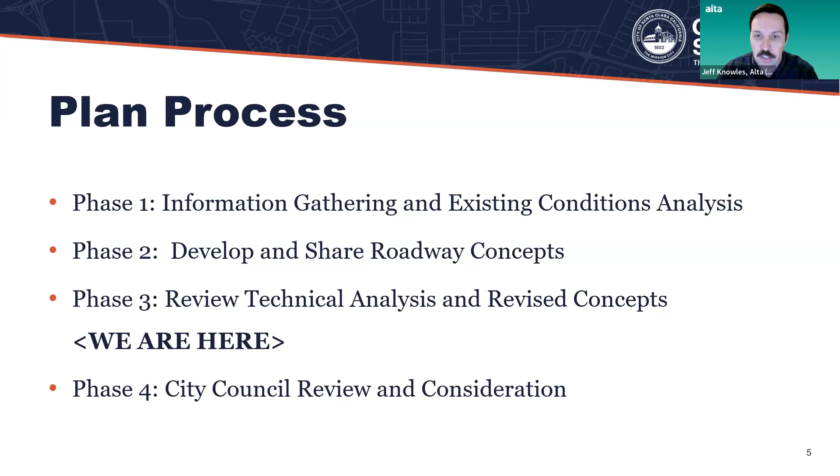In terms of the schedule, this is our third phase of community workshops. This will be the last time we have a dedicated community meeting for this, but we welcome you to come to future BPAC meetings — that's the city's Bicycle and Pedestrian Advisory Committee — and to the City Council adoption meeting.

Those will happen. There'll be a BPAC meeting later in the spring, and City Council consideration is anticipated for summer or maybe even early fall.

So a little bit about the project: the 2.6 mile Benton Street corridor is primarily fronted by residential land uses, but includes Santa Clara High School in the middle.

There are also many important community destinations along Benton Street or just off the corridor, including Carmichael Park, Central Park, Carly Park, and the San Tomas Aquino Creek Trail.

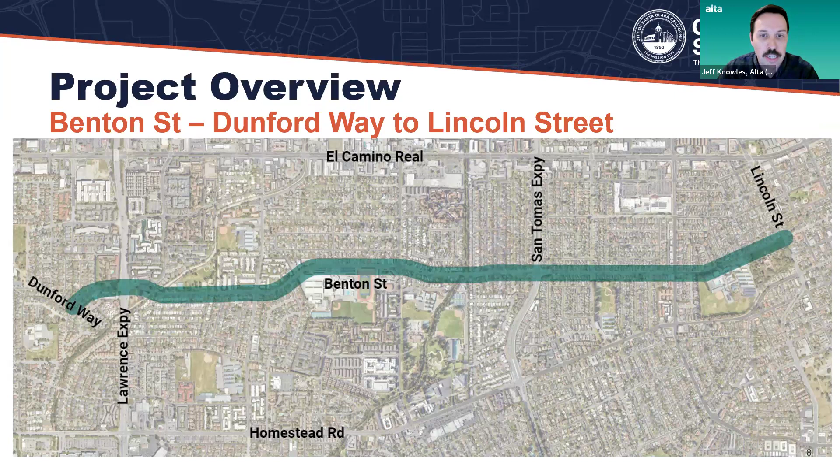I should mention real quick that this project is from Dunford Way to Lincoln Street, so that's the 2.6 mile corridor.

There are some different characteristics along Benton Street for this corridor, from Dunford Way to Lawrence Expressway. It's a very short segment of the study corridor, 0.1 miles, and it's 60 feet wide from curb to curb. It's a 2-lane roadway, and the posted speed limit is 25 to 30 miles per hour.

1.7 miles, the middle section from Lawrence Expressway to Maryann Drive is 64 feet wide, and it has 4 to 5 lanes. Posted speed is 25 to 30 miles per hour.

And then finally, from Maryann Drive to Lincoln Street, the roadway shrinks down to 38 feet wide. It's just shy of a mile, and it's a 2-lane roadway with a posted speed limit of 25 miles per hour.

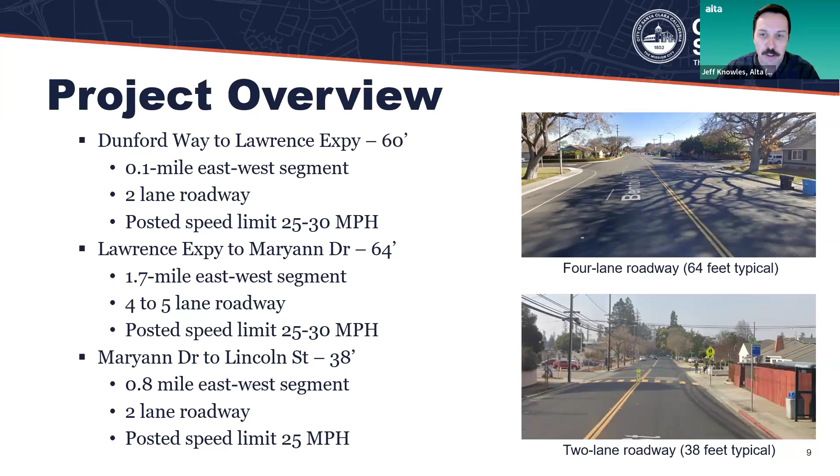We've been doing a lot of community engagement and outreach. In our first phase, we had 2 community workshops just like tonight. We had an online survey. We went out into the community and held 2 pop-up events, and we met with the city's Bicycle Pedestrian Advisory Committee. In phase 2, we had 2 additional workshops, another online survey, 2 pop-up events where we went to meet with different high school communities.

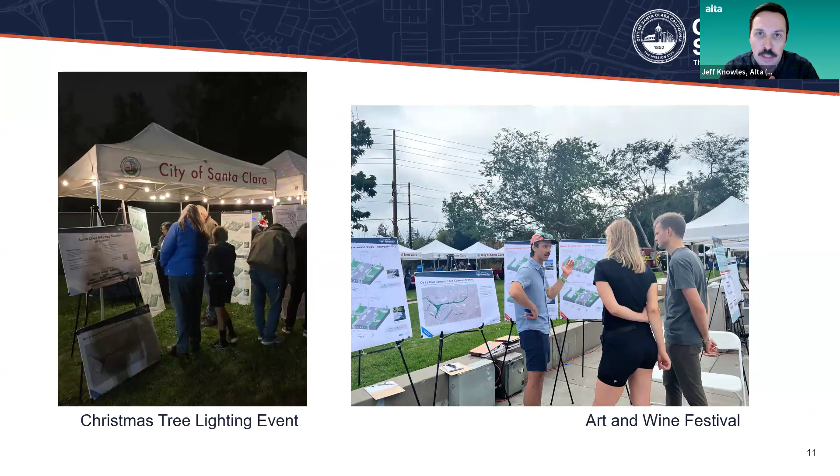Hopefully we saw some of you at the city's Christmas tree lighting event or at the Art and Wine Festival back in the fall and winter. This is where we had early draft concepts, and we were collecting feedback from the public about what these concepts could look like and the trade-offs.

We had a very well received online survey where we collected over 258 responses, and 10% of those were affiliated with Santa Clara High School. We asked about the level of support for different concepts and feedback on why people supported or didn't support some of these concepts that we'd come up with.

I want to report that respondents affiliated with Santa Clara High said having bike lanes will make it much easier to get to and from school and will provide overall improved road safety for all road users, and supported any bike lane installation.

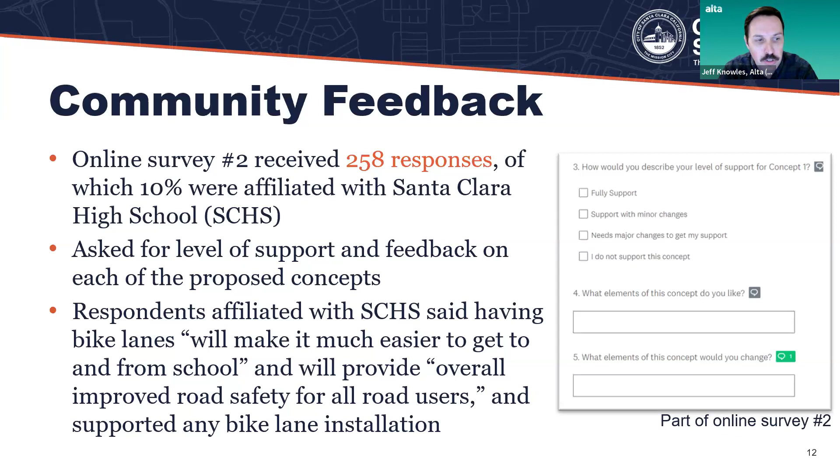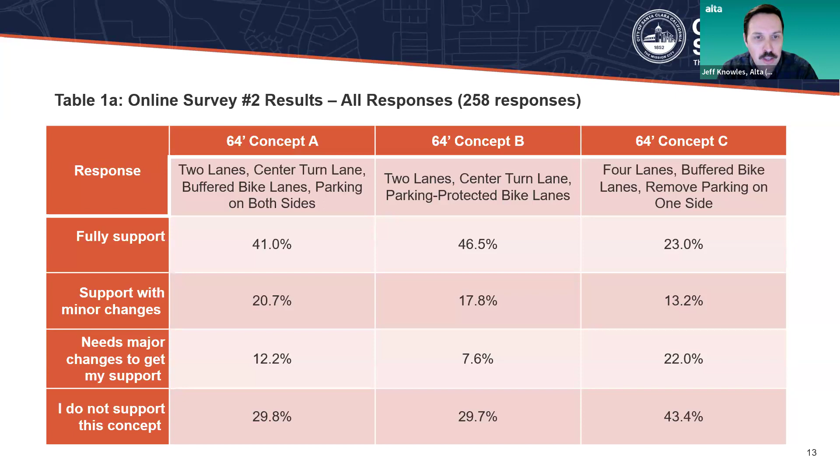The results from that second online survey that concluded earlier last year: 46.5% support concept B for the 64-foot section. This is 2 lanes of traffic, a center turn lane, and parking protected bike lanes. Coming in second place for fully support was concept A, which is 2 lanes, a center turn lane, and buffered bike lanes with parking on both sides of the street. Concept C for this segment came in at 23% of the support.

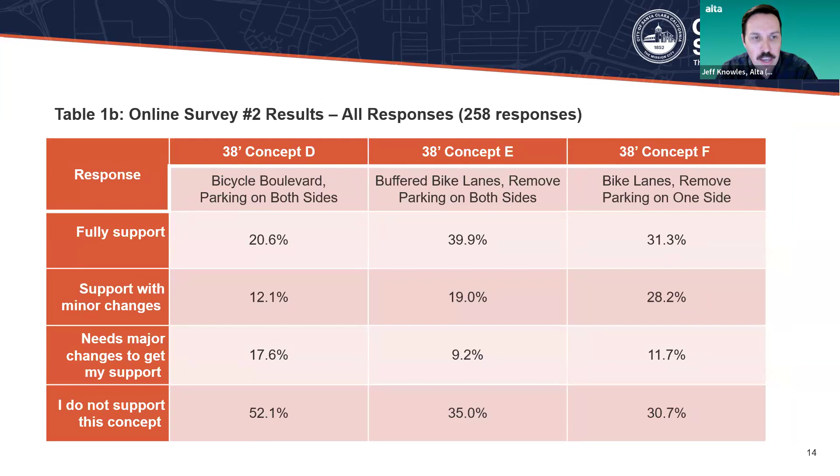There are also concepts for the 38-foot segment, and the highest support there you can see was concept E, which is to remove parking on both sides and install buffered bike lanes, at 39.9%.

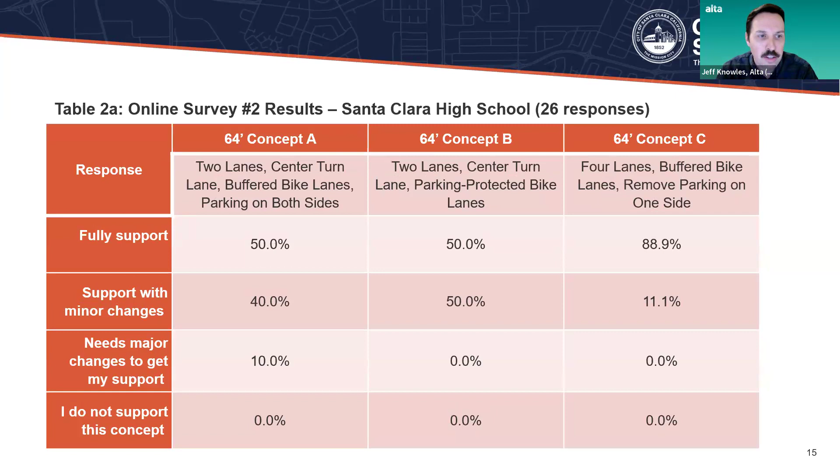And in the 38-foot section, split between E and F. E being removing parking on both sides to fit buffered bike lanes, and F removing parking on just one side and adding standard bike lanes. Those were the ones most supported by Santa Clara High School.

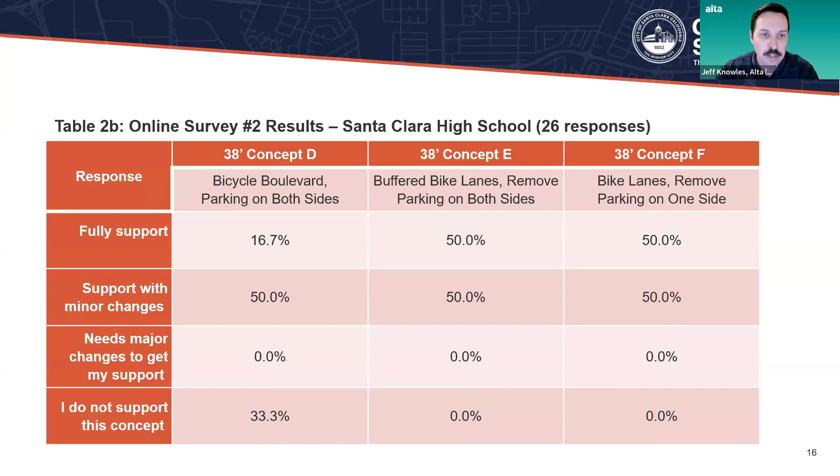So this survey is concluded and a new one is launched. We encourage you to go online after this meeting and enter your preferences so we can collect that for City Council for their review.

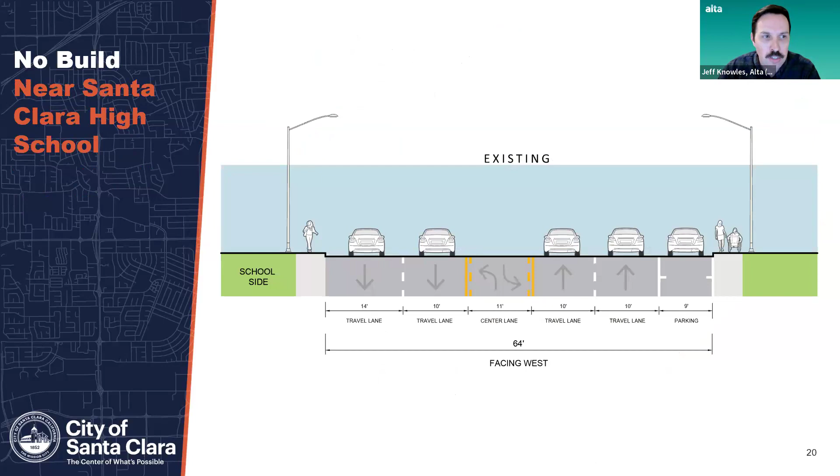The condition varies from Live Oak Drive to Sonoma Place near Santa Clara High School, where there is a 2-way left turn lane, parking only on the north side of the street, and parking restricted along the south side of the street. You can see that here in this cross section. So this is just this section near Santa Clara High School.

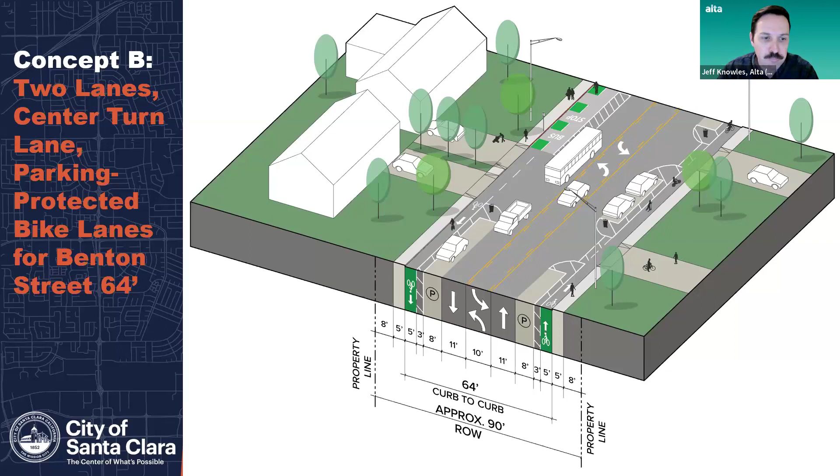Concept C maintains two travel lanes in each direction. Here we are removing parking on one side of the street in order to fit in buffered bicycle lanes. This study does not make a decision about which side of the street would lose parking under this concept. We've evaluated the impacts to parking on either side, and we'll be sharing that in just a minute. Travel lanes would also narrow to 10 to 11 feet, and you'd have a 7-foot wide buffered bike lane.

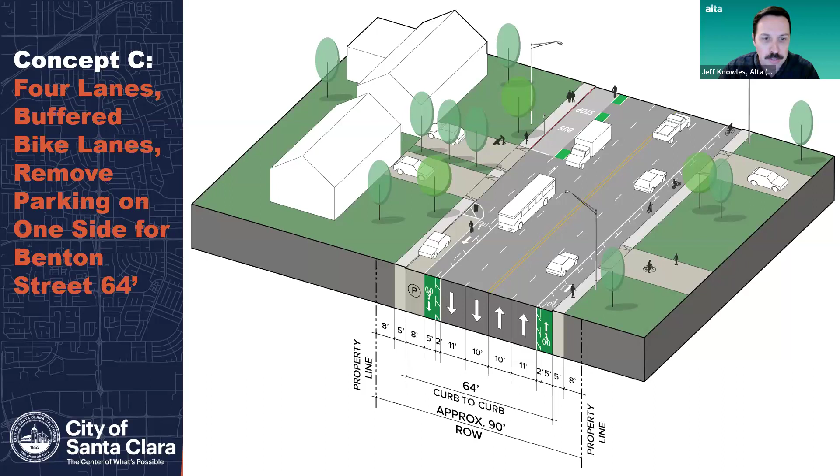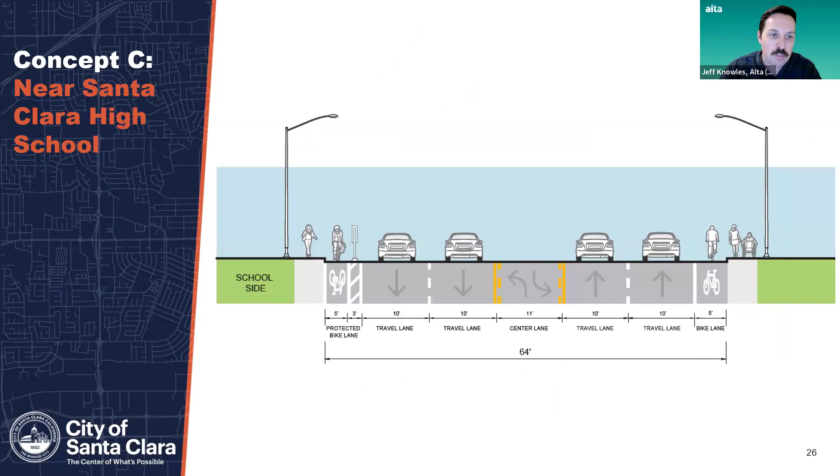Alongside Santa Clara High School, this concept keeps four travel lanes and a two-way left turn lane. On the north side of the street, parking is removed and a 5-foot wide bike lane is added—a very standard bicycle lane, with no room for a buffer in this scenario. An 8-foot wide parking protected bikeway is added to the south side of the street, with 5 feet for the bikeway and 3 feet for the buffer. Moving further east to the 38-foot typical section.

This is what is out there today. This represents your no-build scenario for this section of Benton Street, from Marianne to Lincoln Street. It's got 2 travel lanes, one in each direction, and parking right now on both sides of the street. The vehicle lanes are 11 feet wide, and your curb-to-curb width, including the gutter, is 38 feet wide.

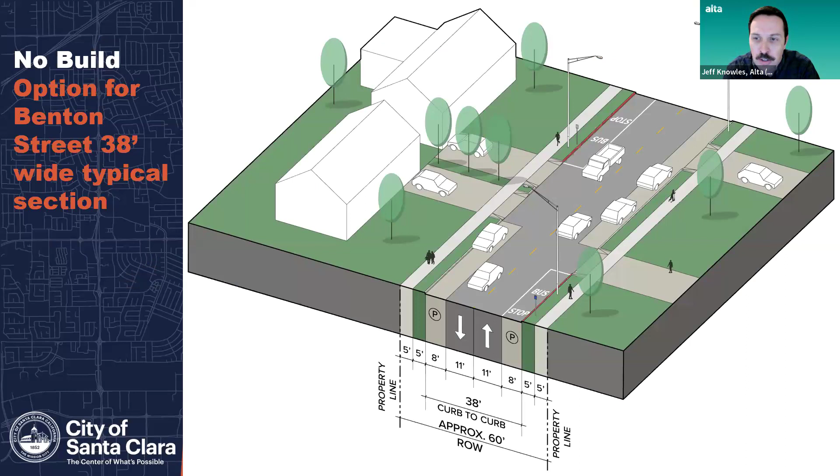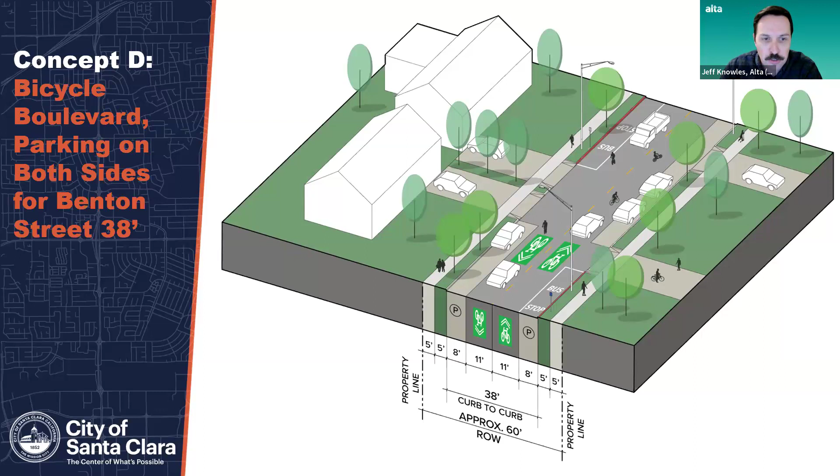Concept E has two travel lanes, one each direction. Parking is restricted on both sides of the street. An 8-foot wide buffered bike lane would be added to each side in replacement of that on-street parking, with a 5-foot bikeway and a 3-foot painted buffer. This is concept E for the 38-foot section.

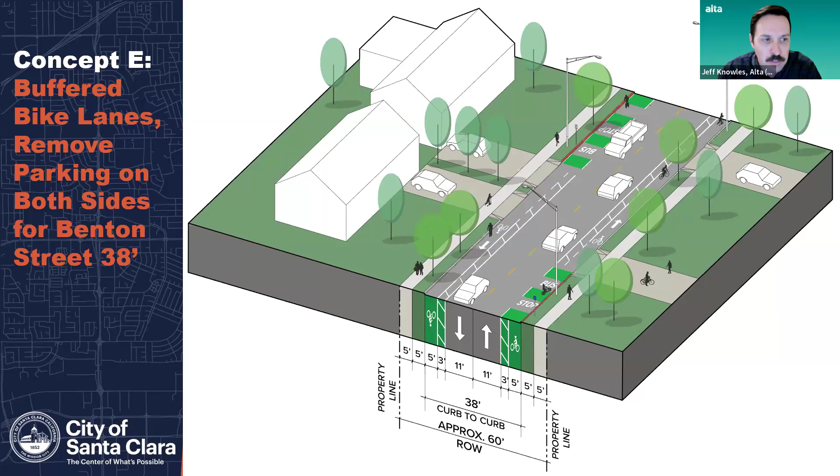Concept F has two travel lanes. Parking is maintained on one side of the street, and a minimum 5-foot wide bike lane is added to each side of the street. Vehicle travel lanes are also reduced to 10 feet wide. Just like in the 64-foot section, we're not determining which side of the street would remove parking, but in order to fit this one in for concept F, one side would need to remove parking.

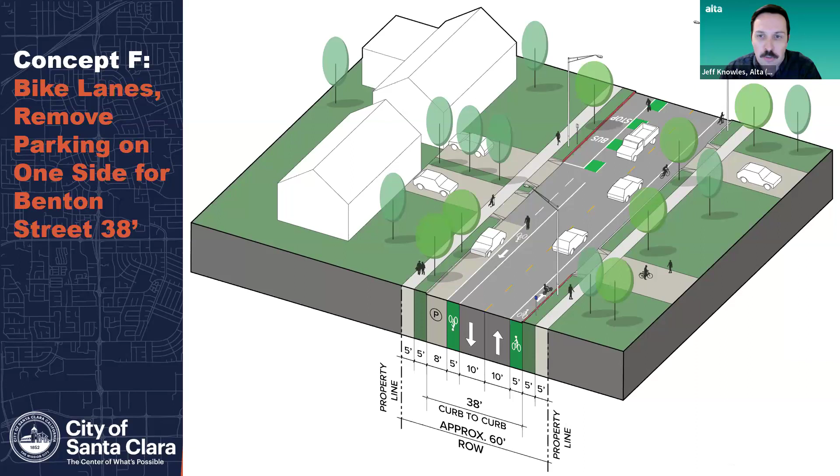And finally, the 60-foot section. This is from Dunford Way to Lawrence Expressway. The existing condition is shown on the top of this cross section. It's got vehicle travel lanes that are 20 feet wide and also parking lanes that are 10 feet wide. It's 60 feet wide from curb to curb, including the gutter.

What we've proposed, concept G, is shown at the bottom here: keeping the number of travel lanes the same and just reducing them down to 12-foot travel lanes. That would free up room for an 8-foot wide buffered bicycle lane in this scenario. So this is concept G. For City Council's consideration and for the public, we're asking you to select either keep it as it is or shrink down the lanes to accommodate this buffered bike lane for concept G.

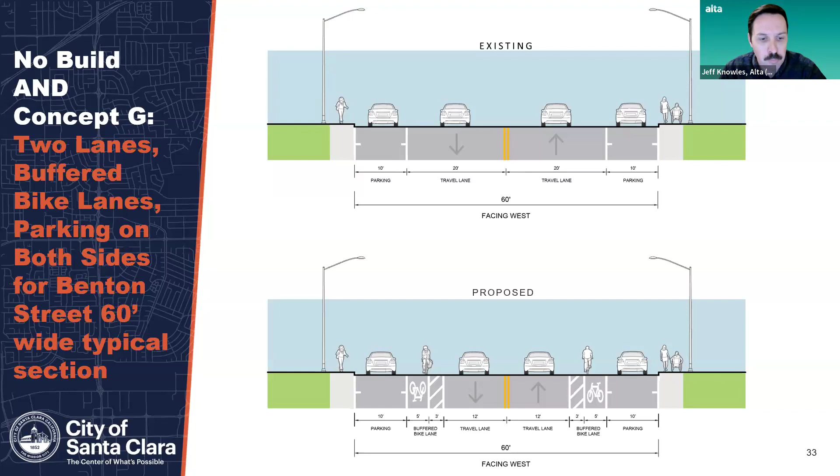So those are the concepts, and we'd be happy to, when we get to the Q&A section, answer any further clarifications you have about how these would operate or any of the benefits. But now I want to talk about some of the trade-offs and impacts that each of these concepts would have for safety, measured by the number of collisions taking place on the corridor, traffic in terms of congestion and traffic flow, and then parking, what each of these concepts would mean for available on-street parking.

So let's talk about collisions first. From 2017 to 2022, which is the last 5 years that we had available data, there were 122 vehicle-to-vehicle collisions and 16 collisions involving a bicycle on this stretch of Benton Street. These numbers serve as a baseline for the no-build or existing conditions concept.

The analysis estimates how many collisions would have been avoided during the same time period if each of these concepts was built. In concept A, which is your 2-lane, buffered bike lane concept with parking on both sides, it's anticipated that there would have been 39 fewer vehicle collisions and 2 fewer bicycle collisions. Most of that comes from the fact that when you take a travel lane down to one in each direction, it makes it easier and safer for people making turns at intersections and getting in and out of their driveways using that 2-way center turn lane, and also slows travel speeds down.

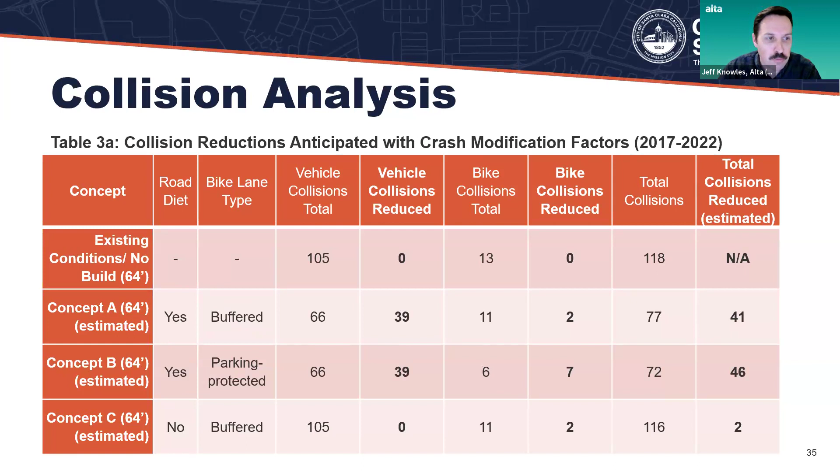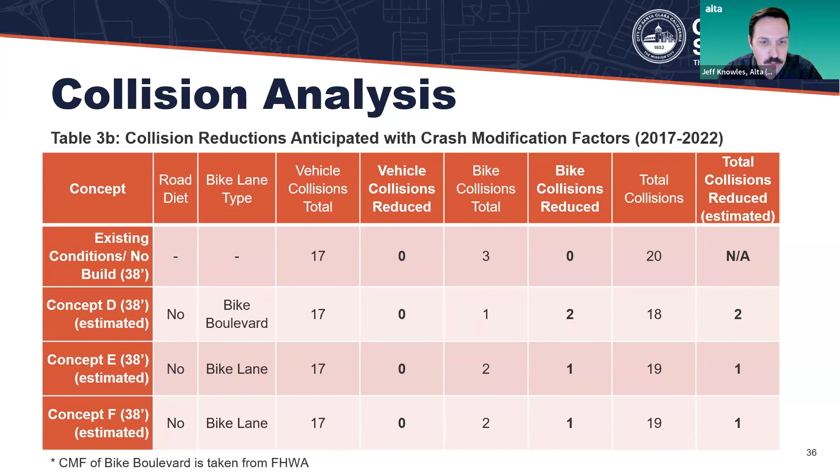Again, for the 64-foot section, the greatest impact would be concept B, with slightly fewer collisions reduced under concept A, no impact to collisions under no-build, and concept C would have 2. Under the 38-foot section, concept D would have 2, and E and F just 1. These, again, are collisions reduced, not total collisions that we anticipate during that time period.

For traffic analysis, the city evaluated the time it would take to currently travel the entire length of the study corridor in a car at multiple periods. We looked at weekday morning between 7 and 9 a.m., that's your AM peak period. We looked at midday between 1:30 and 3:30 p.m., which corresponds with the release period for schools in the area.

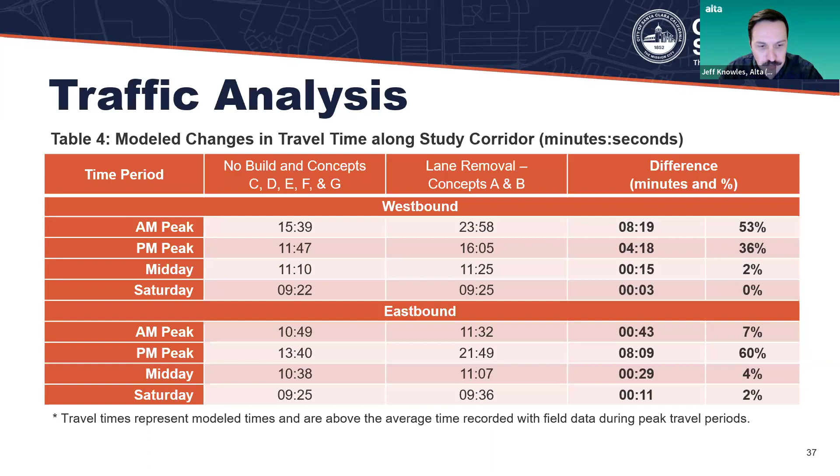We also evaluated the level of service at intersections along the corridor. We modeled this at 36 intersections, both along Benton Street, but also on surrounding streets to demonstrate any of the impact for any spillover effects that would have in the surrounding streets. Based on the level of delay, each intersection gets a letter grade, which is A through F, based off of modeling traffic speeds, volumes, and the density of traffic.

Intersections with LOS A through D currently meet the city's standards. Intersections with LOS E meet the city standards for El Camino Real, which is a state highway, and any of the county expressways. Otherwise, LOS E and F are considered substandard.

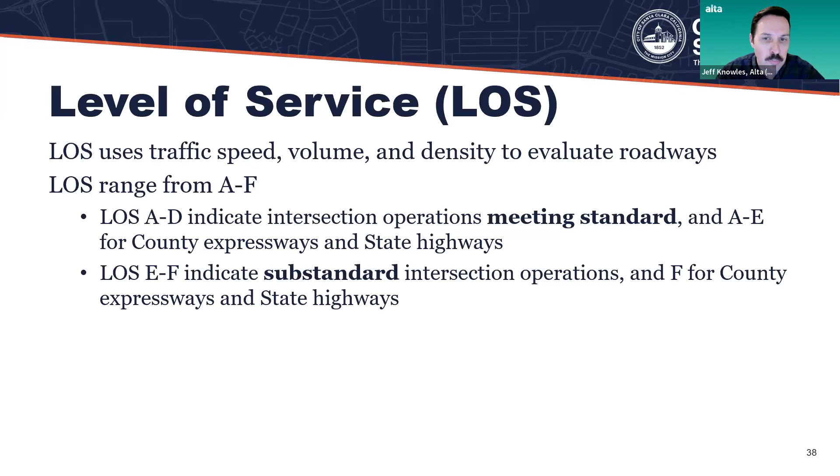So of the 36 intersections that we studied, 3 are currently substandard in the AM peak period, and 3 are substandard in the PM peak period on weekdays. Under concepts A and B that involve the reduction of 1 travel lane, the number of substandard intersections does not change. There still would be impacts at these, but they're minor and they don't change the scoring of those letters.

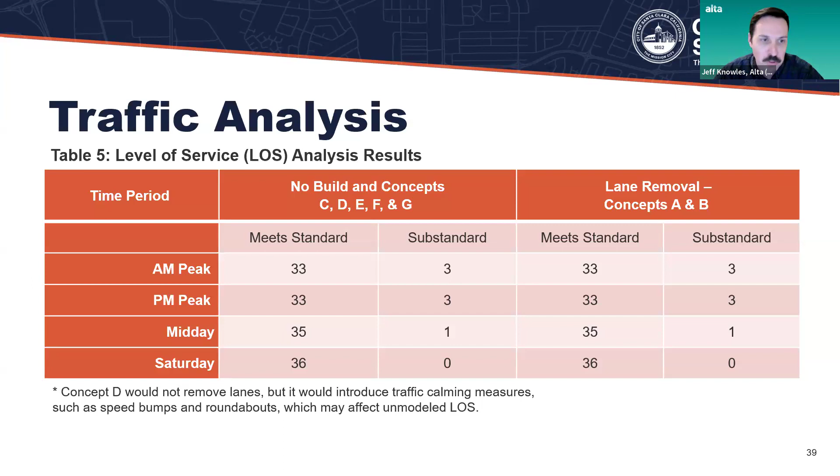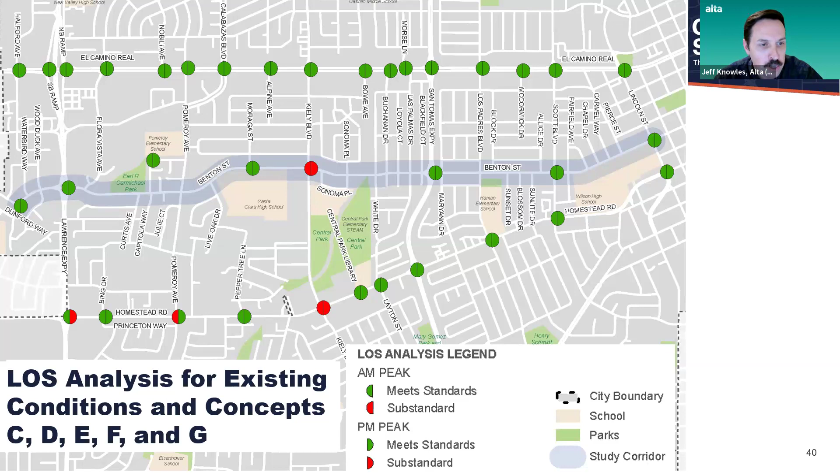So they'd be the same in terms of meeting standards or not meeting standards. We've mapped those as well. This is current conditions and the concepts that don't involve any reduction of travel lanes. You can see that today on Benton Street, both in the AM period and the PM peak period, Kiely and Benton don't meet the city standards. And then if you look down on Homestead Road, there are a couple points where these intersections are not operating at city standards: Kiely and Homestead, Pomeroy and Homestead in the morning, and then Lawrence and Homestead in the afternoon.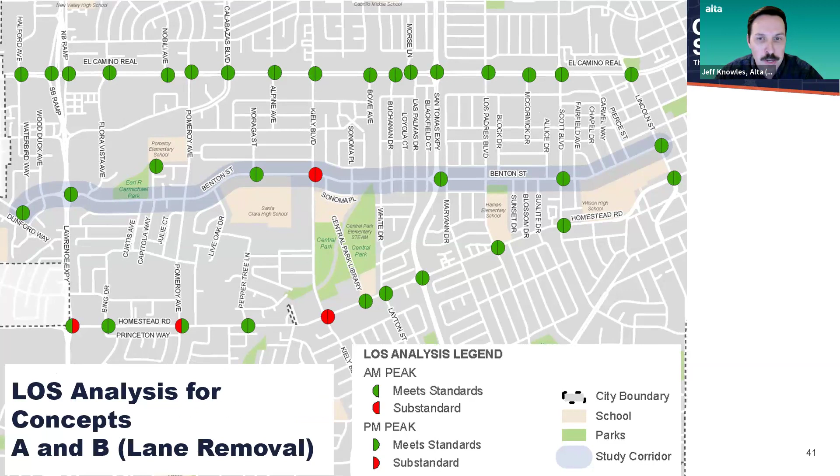We then looked at parking analysis, looking at the changes to parking utilization. Under existing conditions, only 30% of available parking is utilized on the north side of Benton Street. Under current conditions, 23% of the available parking is used on the south side. Overall, that's 27% along the corridor. So think about it this way: 3 out of 10 available parking spaces are used at the highest demand time periods.

We counted traffic during the morning, during the midday, and we also counted parking overnight, where there would be the highest demand for parking for residents. We also looked 500 feet on all the side streets that touch Benton Street, and of those, 29% of available parking is used. We then modeled what would happen if you took parking off on each side of the street. So for concepts C and F, which remove parking on one side of the street, it would increase from 23% to 40%.

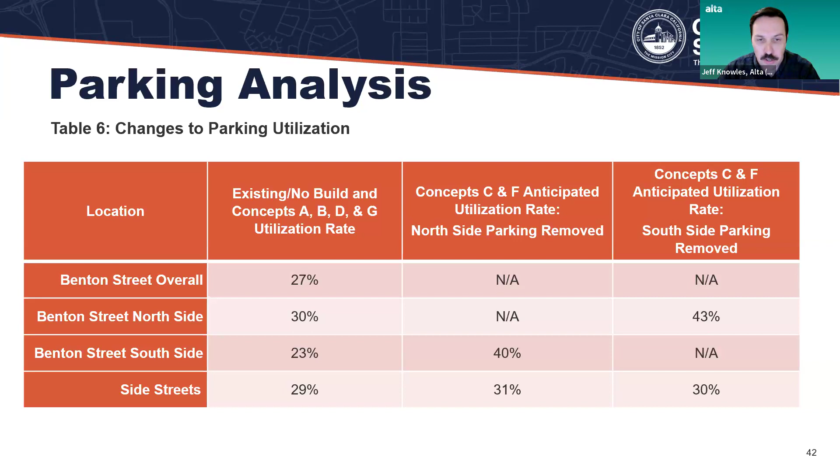If you took parking on the north side off, that's what would be on the south side, and then you jump from 30% to 43% on the north side of the street. So there would be some impacts to parking, and we've also modeled this out in different scenarios.

For the 64-foot section, you can see here, this is current conditions. In green, these are the sections where there's available parking, typically over 50% of these sections of the corridor are available for parking. Yellow is 50 to 30% available. Orange gets a little tighter, 30 to 15% typically available.

And in red, these are the areas with the highest demand, the least availability for parking. So you can see on Benton Street, there's a short section, Loyola Court to Las Palmas Drive on the north side, that has a high demand currently.

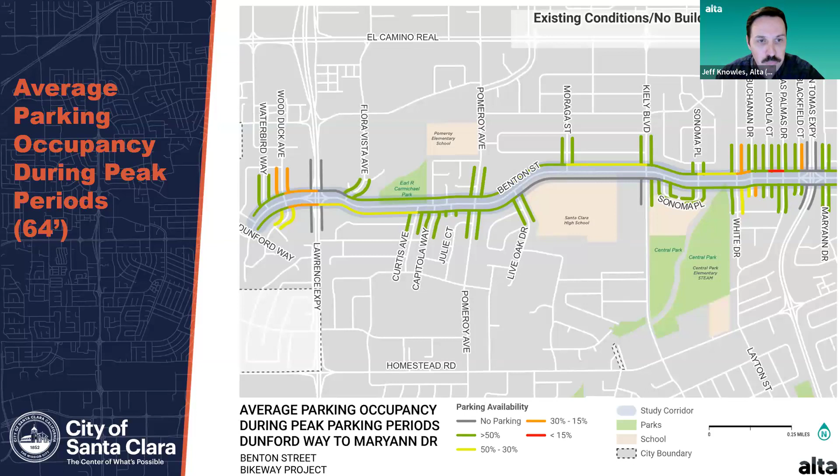Concept C is the one that would remove parking on one side of the street. In this scenario, we're showing what would happen if you took all of the parking on the north side of Benton Street off. You can see there would be impacts on the south side from around Live Oak Drive to Lawrence Expressway, but there should still be available parking on the street or on side streets.

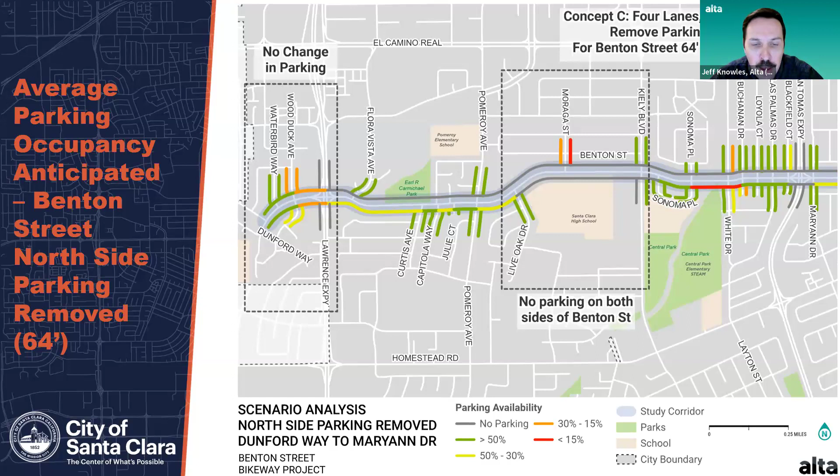It does get impacted more around Central Park. You can see here from around Sonoma Place to White Drive, there would be a higher impact, higher demand for parking, less availability.

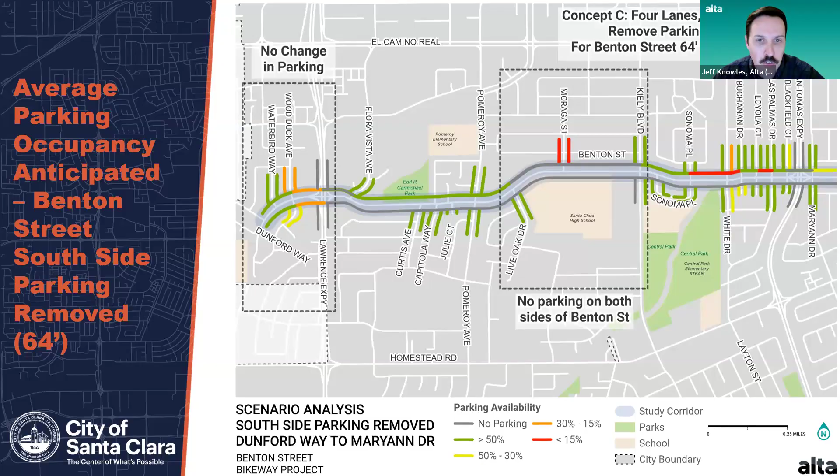If we took parking on the south side and moved it to the north side, you could see there would be high demand on the side streets around Moraga Street, across from the high school, and also in the same scenario, Loyola Court to Las Palmas Drive and Sonoma Place to Buchanan. Very limited parking in those locations in this scenario, but there should be some available parking on the closest side streets as well. So just wanted to share the impacts of parking under this concept.

For the 38-foot section of Benton Street from Maryann Drive to Lincoln Street, this is current conditions for on-street parking. You can see there is some demand for some of the side streets, and from Block Drive to Scott Boulevard, there is a little bit of demand there.

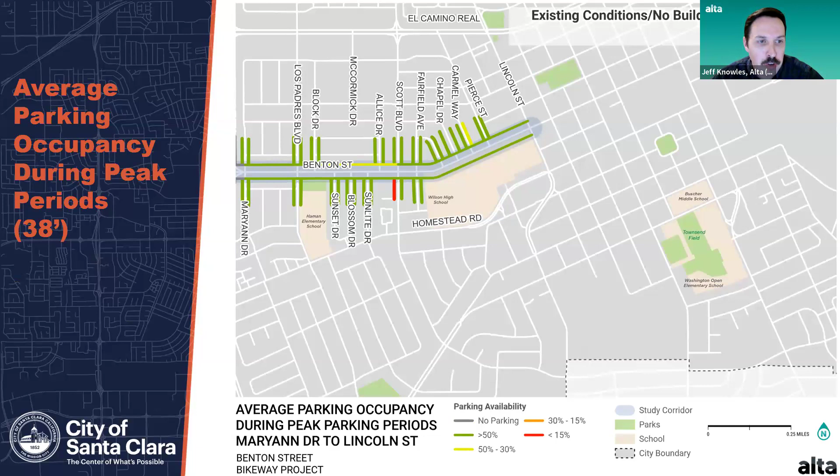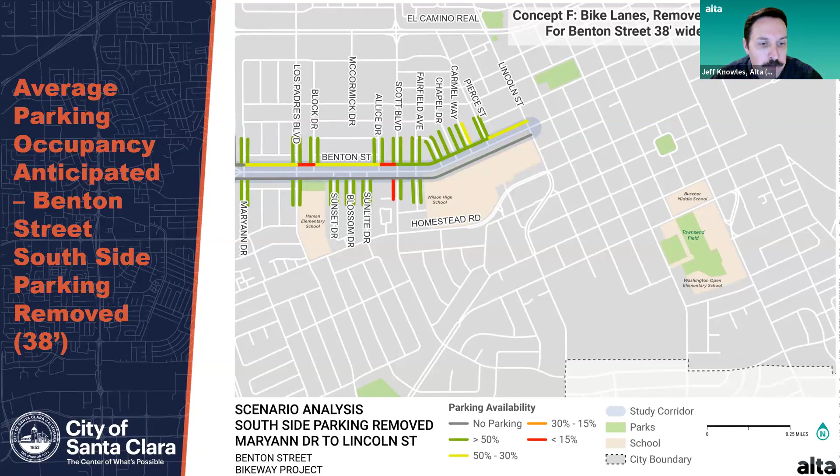If we flipped it, and the city moved forward and took parking off the south side of Benton Street and moved it to the north, you could see that there'd be high demand in some small blocks, but overall 50 to 30% or more available for those blocks.

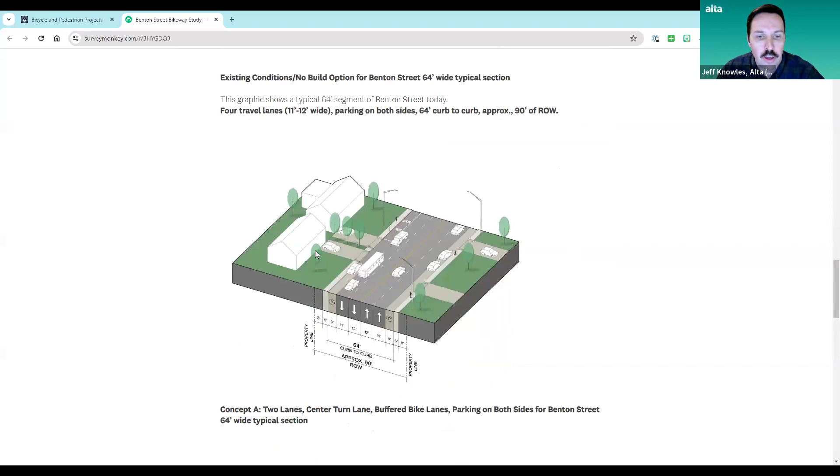And then it drops you down and shows you again a thumbnail view of each of the concepts if you want to get refreshed in real time on what those look like. When you click next...

There are some required questions. And then you could click next, and it'll take you to the 38-foot section.

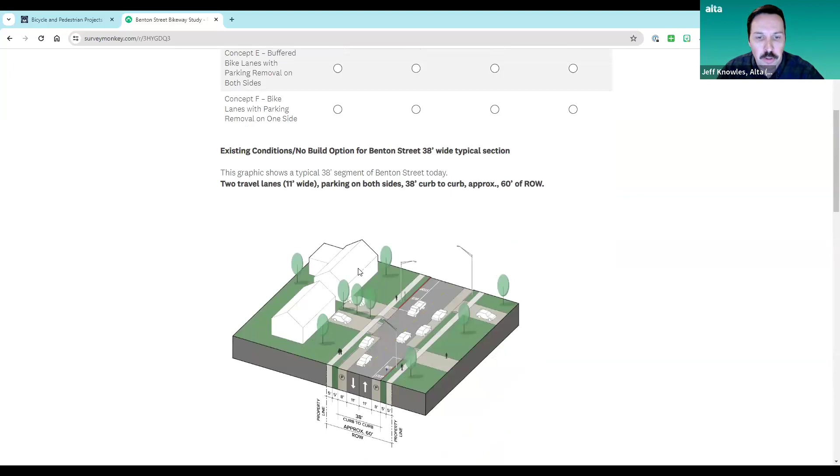There we go. And once again, for the 38-foot section of Benton Street, there are 4 options. Please put those in your ranked choice. And if you need to be refreshed on what those look like, there are thumbnails with descriptions of each of the concepts here.

And then you click next and submit. So at this point, I'm going to bring it back to the presentation and look forward to getting into your comments and clarifying any questions that you have for me or for the city.

Again, we've got Nicole here with us. We also have Steve Chan, the city's transportation manager, here with us tonight. So let me go ahead and share screen. At this point, the Q&A window is open, and you should be able to indicate by raising your hand at the bottom if you would like to come off of mute and give us questions or comments.

Right now, I don't see any hands up, but I do see some questions in the Q&A window, so maybe we can start there. And if folks want to come off of mute to provide their comments or ask questions, you can just do that by clicking on the raise hand function at the bottom of the Zoom window.

All right, so let's go ahead and take some of these questions here. First question comes from Diane.

I'd like to point out that with option B, which is the 64-foot wide section, the garbage can option will definitely not work in front of multifamily complexes like Pomeroy Green with lots of garbage cans. It may also not work well elsewhere when garbage cans are inadvertently knocked over by garbage trucks. Please don't select option B. Thanks for that comment, Diane.